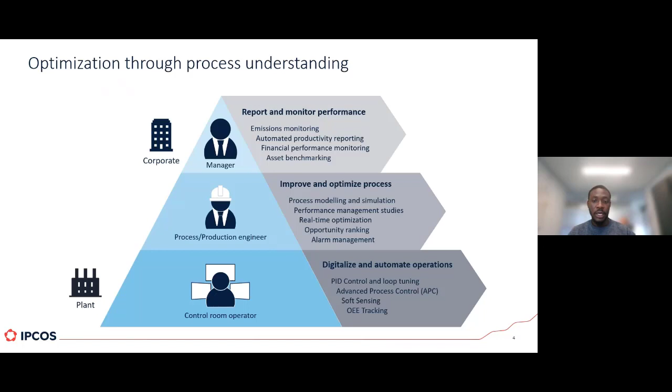Focusing specifically on what IPCOS does, IPCOS's expertise aims to facilitate the needs of users and their use cases. So be they a manager, a field operator, or an engineer, we work with our clients towards optimization, ease of communication, performance monitoring, and specific use cases pertaining to the needs of a specific user.

IPCOS also partners with technology players across all levels of automation. We have worked and still work with partners including Microsoft, AWS, Aveva, and AspenTech. IPCOS also has its own proprietary software pertinent to our advanced process control side of the business.

With our reach across continents and in the process industry, we have clients cutting across industries such as refining, petrochemicals, specialty chemicals, and so on. And these are the industries where batch processes exist. Today's webinar will be focused on the steps towards achieving operational excellence in these processes.

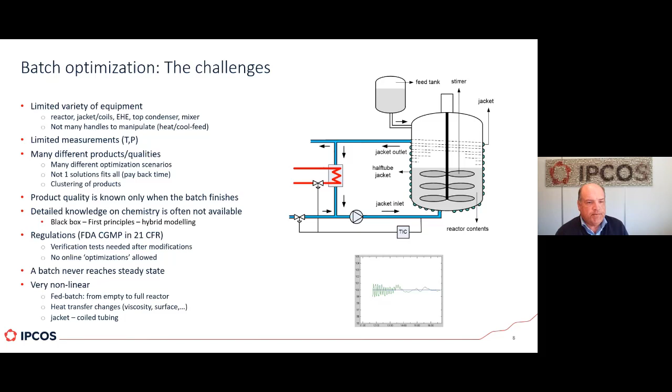So those are all the nasty properties of batch reactors, which makes it much more difficult to optimize them, although from a distance they look like very simple processes.

And then, of course, everybody wants to have the golden batch. The least an optimizer should do is promise and realize that every time you run the batch, you follow the golden batch. The golden batch is the best batch you have ever achieved, really achieved, not in theory but actually executed during the runtime of your equipment. If your optimizer can make sure to repeat that golden batch again and again, most people are already extremely happy.

So that's at least one thing we should do with optimization. Then you can go one step further by saying the golden batch is not the ultimate batch. There is, let's call it, a diamond batch, which is even better, faster, better quality, and so on. That will then become the new golden batch once we achieve it, and from then on it becomes the new standard. So we're going to do everything we can to repeat that new golden batch from now on.

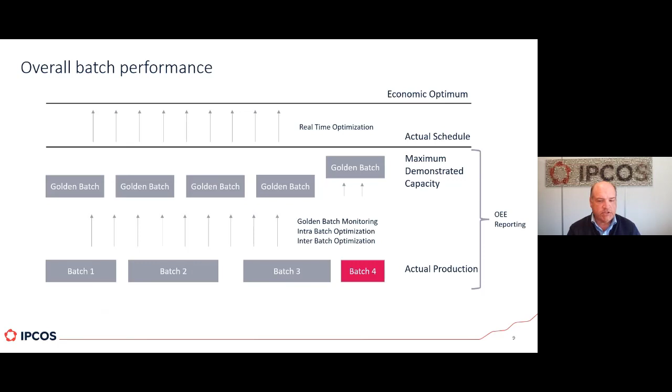And we have different ways to do that: golden batch monitoring, which we'll talk about very briefly, intra-batch optimization, and inter-batch optimization.

Now, if you want to do optimization, then of course it is important to measure how good or how bad you are actually performing, or your batch. OEE is one of the methods which is very often used.

So you have OEE monitoring tools where you see, for instance, so many hours or minutes or seconds in a day. Based on the graph, you can see how much percent of that day the batch was really producing the right quality, because sometimes it produces, but the end result is bad quality. That means a part of the time the batch was producing something which is bad, meaning it was not useful, that batch run.

So that is something that we as IPCOS also provide to our customers, these OEE integration services, because the idea is, first of all, that you bring all your data together from one unit, from multiple units, from one site, from multiple sites. And you do it such that it is automated as much as possible, that you don't have to rely that much on operators to fill in forms and so on.

So there are systems which help you to automate the OEE dashboarding and KPI calculations as much as possible, so that you don't have to rely that much on people to fill in forms, because that means sometimes they will not do it, or they will not do it accurately. So try to do it as automatic as possible.

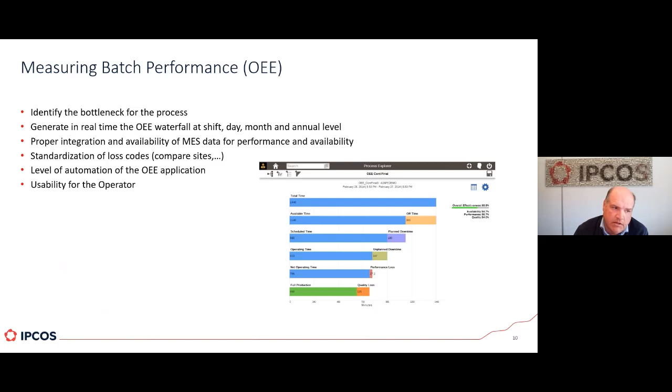Different ways to optimize a batch run.

I have about 3 categories, let's say, and one of them is the least invasive, what we call the golden batch monitoring. So you have your golden batch, we have not changed it yet, so the golden batch is defined from the history. And you have a sort of envelope around your recipe, for instance, and you monitor if your current batch follows or stays within the envelope around your golden batch. It is the least invasive monitoring system, because it just tells you you're doing a good job or you don't do a good job.

Does it already help? Yes. Because assume halfway your batch you get an indication that you don't follow the envelope anymore, or you're drifting away from the optimal recipe, then as an operator you might still intervene and do some corrective actions, if that is possible, if you know what to do when something happens. Worst case is that halfway the batch you say, let's stop the batch because this is going nowhere. I'm going to save 3-4 hours of batch reactor time, because I know that if I let it run it will finish in 3-4 hours, but the quality will be waste anyway. So it's better to stop it now.

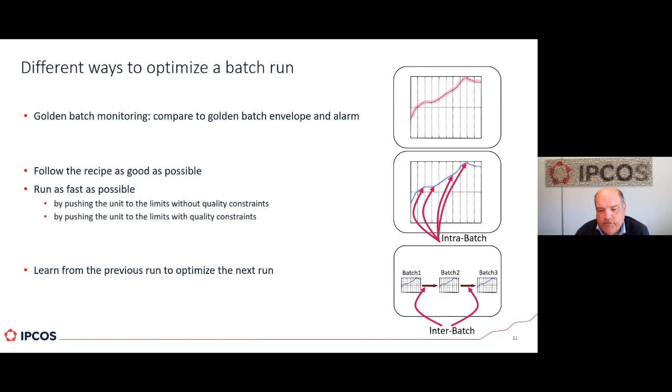There are also a whole bunch of assumptions that we have to make there, but I will come to that later. Follow the recipe as good as possible, and that's typically the job of PID control. So first of all, you have to do an optimal design of your controllers, and then you have to do optimal tuning.

Optimal design means it is very nonlinear, a batch. So valve linearizations, because especially with fed batch, you start with valves which are hardly open, 5%, 10%, because you need hardly any cooling. And then when the batch is full with 60 tons, you need a lot of cooling, so that valve is going to travel from 5% to 95 or 100%. A flow controller can do the job, but in certain conditions you have to do valve linearizations. Split range - why is that important?

If you have temperature control where you heat with hot water and cool with cool water, depending on the delta T of the reactor temperature compared to the cool water, or compared to the hot water, the gain is different. So the impact of opening a valve 1% on the cool water side might be much bigger than the impact of opening a valve 1% on the hot water side. And a PID controller doesn't like that. Good split range control design helps you to overcome that.

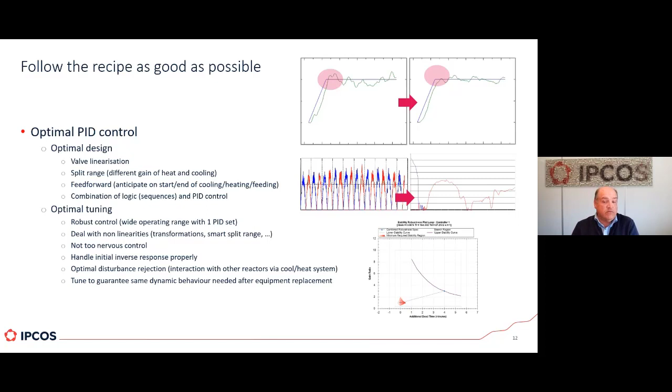Optimal disturbance rejection, especially if heat exchangers talk to each other. Because sometimes you have a hot water circuit and a cold water circuit, and you have a whole bunch of batches connected to it. And if the hot water or the used water from one is entering the other one, then these reactors are going to talk to each other through their cooling and heating system.

That is disturbance you might have to deal with in PID control. So quite already a challenge that you have, and you have to do some optimal PID tuning. First of all, use the proper DCS template. If it's a Siemens, a Rockwell, Emerson, or Honeywell, whatever, tell your software which kind of PID template you have, because that makes life easy.

If possible, that's what we ask our customers, but it's not always possible. We try to convince them to go first for water or solvent batch runs, where not the real products are in there, but some water or water combination with solvents, so that we can do proper tuning based on that. It's as good as it gets, because it's not the real product, but okay, it's better than nothing.

We really like to apply step tests in open loop, with a decent signal to noise ratio. Operators don't like that, but sometimes, well, it has to be done.

Plan B is, of course, that you can do closed loop testing, which is much more difficult. It's not that you throw closed loop data into a PID tuner and, of course, a model will come out and a tuning will come out. Will that be the right tuning? Well, that's the big question. In fact, it's not a question, the answer is no. So closed loop step testing, watch out for it.

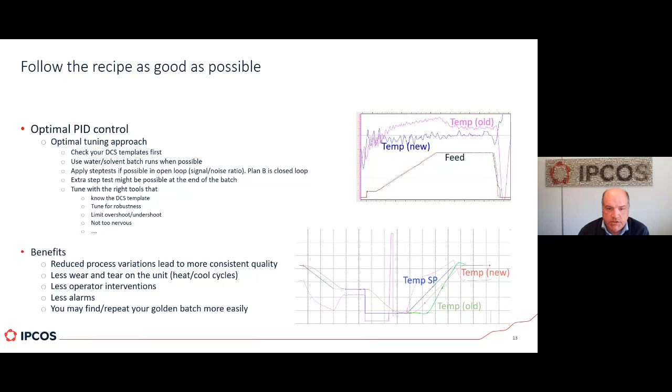Now let's go one step further: run as fast as possible by pushing the unit to the limits with no quality constraints. What does that mean? You assume that you have cooling and heating limits, and that you're going to feed typically as fast as possible. So you're going to change the recipe in this case, and you're going to push to these limits, and you assume that it has no impact on the quality. Okay, that is a very serious assumption, but okay.

Now, what is the advantage if this assumption holds? In fact, you can consider your batch reactor as a non-ending continuous and linear unit. You only have to look a couple of minutes in the future, 10 minutes or so, depending on the batch run—let's say 10 minutes in the future. So it is the principle of receding horizon, what you typically find in classical APCs. Receding horizon: you look into the future, and then you're going to anticipate disturbances and so on, in order to optimize your cooling and heating.

So a standard APC can do the job. You only have a few handles to play with: the feed, and then also play a little bit with the heat exchangers. There's not much you can play with. Disturbances, of course, is perfect to deal with a classical advanced process control. And the nice thing is it's a very small APC—there's almost nothing to play with. A couple of MVs, you have 2 MVs, 3 MVs max. You have hardly any measurements. So a very simple small controller can perfectly do the job.

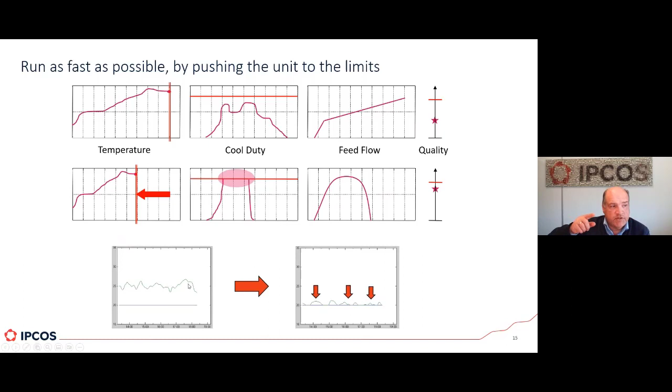Here is a real life example, where you see the inlet temperature of the jacket from the batch reactor. The cool water is at 20 degrees, and the inlet temperature fluctuates around 25 degrees. So there is a part of the cooling water that always goes around. Now, what is the maximum cooling capacity that you have if you only supply fresh cool water and almost nothing comes back?

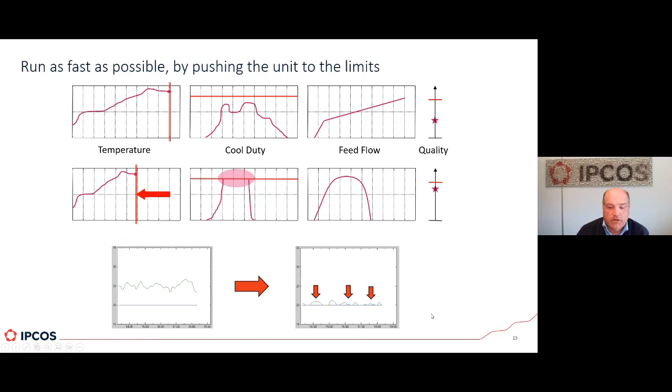That means that if you see your cool water inlet temperature of the jacket close to or at the cool water supply temperature, that means you consume or use all the cooling capacity available, which allows you to speed up the batch reactor. And that's what you see over here - the inlet temperature of the jacket is almost always, or very close to, the cool water supply temperature. Which means you did whatever you could to speed up the batch reactor, and the quality is still okay.

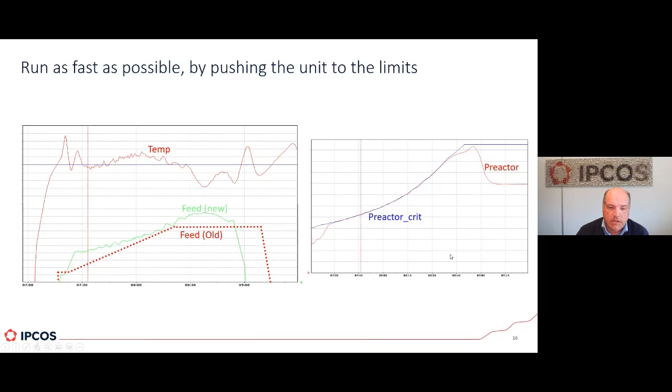So that's what you see, for instance, here as well. The old feed recipe is like this, and this is the new one. You see that you feed faster and more - temperature profile - and then you can add, for instance, an extra constraint, which is the critical reactor pressure, a hard constraint that never exceeds this blue line over here. You see that the APC controller perfectly complies with that. So that's the most easy APC type that you can apply on a batch.

And now the most complicated one is where you say run as fast as possible, but by pushing the unit to the constraints, I'm going to hit my end quality constraints. I cannot tell you at this moment that by just simply looking at the maximum pressure or maximum temperature or a deviation, that will have a quality impact, or no quality impact. No. What you have to do is have a model between what you are doing at this moment and the end quality, and that can be a quite complex model.

So you have to look at your batch as something where the APC always looks until the end of the batch: when I'm doing this, it's going to have an impact on my end quality. Now I'm going to increase the temperature a little bit - oh, my end quality, the density, the color or whatever is going up, and that's not allowed, so I should not do this. So you have to have a relationship between what you're doing now, and even more what you already have done, what you tend to do based on the recipe probably, and then the impact on the end quality. And that is something completely different.

You need other tools and other technologies to deal with that, because you need to have a quality model between process conditions and end quality, in an environment where nobody really knows what's happening inside the reactor.

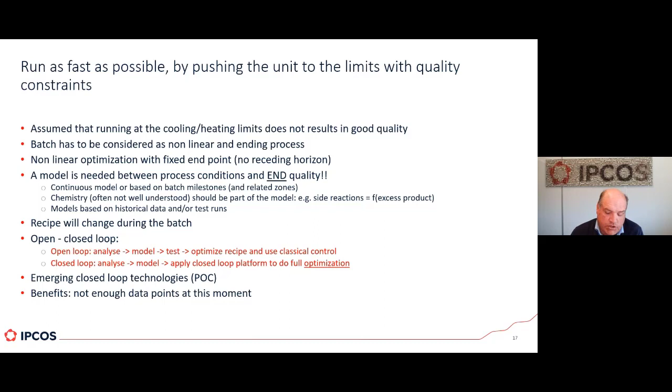So there are at this moment, depending on which vendor, a couple of strategies that are used. One is where you say we have a couple of milestones we define, and you can make as many, well, not as many as you like because it will complicate the approach, but you define a couple of milestones.

And then you make a model between what happens at that milestone and the batch end. So you have here a model between this point and the end quality, between this point and the end quality, and so on. That's the most simple, based on black box, principal component analysis, AI, and so on.

The next level is that you say, I have these same milestones, but I'm not only going to look at the condition at this point, I'm also going to look in one way or the other. I'm going to lump the history between this milestone and this one. So what have I done here, or what happened in this area over here?

I'm going to use the conditions here and what happened over here to estimate the end quality. Yeah, that's a little bit more complicated, a lot more complicated, but that's the next step. Also black box data driven. And then the most complicated one is where at every minute or second you have a whole model that really takes everything into consideration, like the linear APCs you find in refineries. At every instance it predicts what have I done, what's going to happen, what's the end quality, and so on. So this is the most complicated one. I have not seen black box solutions that are able to do that. Very often people start looking into first principles.

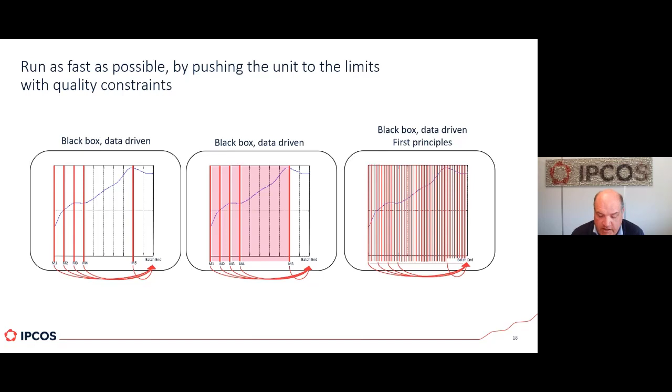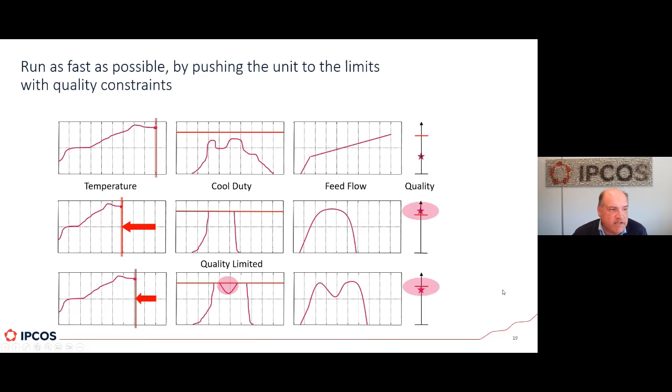Keep it simple - that's always been a very good approach in the APC world, and I think here it's also valid. So comparing it to the previous one where I said push to the limits and everything will be fine, you have a different story here. You push to the limits, and then you see the quality is above what is acceptable. That means there's a milestone where you say, no, I have to stop pushing the cool constraints or heat constraints, whatever. I have to back off a little bit because that will bring my quality back into the specs. And to do that, you need a whole different kind of technology. That's what you see over here.

This is a batch recipe - the feed flow, and this is a fed batch. You see we started decreasing the batch time, so it's faster and faster and faster. You see feed changes. It's not as strict as over here - it's a little bit higher than the set point. So you can finish earlier, provided you know exactly what to do to guarantee the quality.

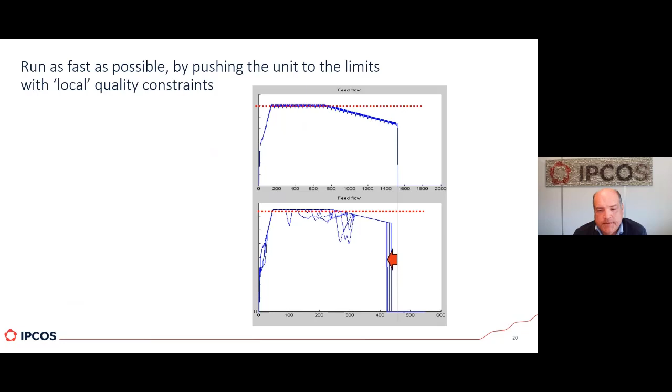We have had situations where the customer said, well, we pushed to whatever we knew based on the knowledge we had, but we saw that in our paint, polyacrylate, there were granules appearing in the paint, and that's completely unacceptable. Then the question is, what should we have done during the batch to prevent that? The answer is no clue. The only thing you can do is slow it down based on engineering feeling, until the granules are gone. Of course, if somebody had known the relationship between the behavior and these granules, we would push to the real limit. But if it's not known, you say let's slow it down a bit until that magic thing we don't want is gone. So it's one way to look at it, but it's not optimal - this is reality.

And the last point, then we finish, is of course to learn from the previous batch to optimize the next one. A couple of assumptions, of course, is that the next one should be very similar or the same as the previous one - that's a no-brainer. But what's less trivial is the fact that you know what the previous batch did before the new one starts, and that's a problem.

Because, for instance, for PVC, the end quality, which is important, is only known after drying, extrusion, and so on - only 12 hours after the batch is finished can somebody tell you, okay, you did a good job. And what have you now learned for the next batch, which probably has also already finished? So as long as you make the same grades, you can keep reusing that information. But if after 12 hours you know what you've done, and in the meantime you're producing a completely different product, that information is almost useless, unless perhaps you can reuse it in 5 or 6 days when you make the same product again, assuming you're working under the same conditions.

And of course, you still need to know what kind of handles to play with. You still need to know the quality was bad because of something. The temperature was too high, the deviation from the set point was too big, we had an overshoot, or the rate of change was off. So somebody has to give you a handle, saying, okay, I'm going to give you a certain limitation for the next batch, and if you comply with it, rest assured the end quality will be good. Somebody has to tell you, or you have to find it out yourself. But that's very critical.

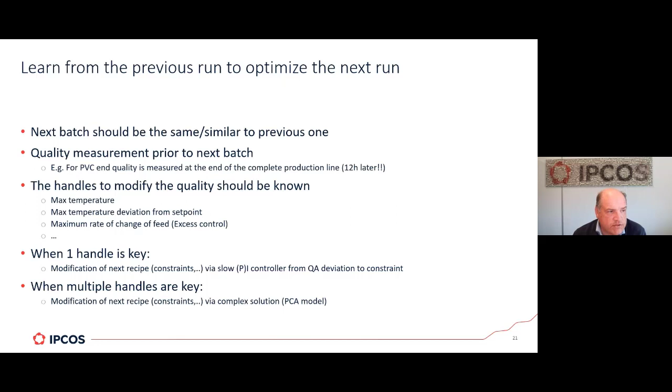Of course, if we have five handles to play with, that's a different story, because which one are we going to play, what's the sensitivity? You have to do sensitivity analysis and so on. So that's a very complex formulation that you have to find. Interbatch control is very powerful under certain assumptions, if you know what kind of handles you have to play with.

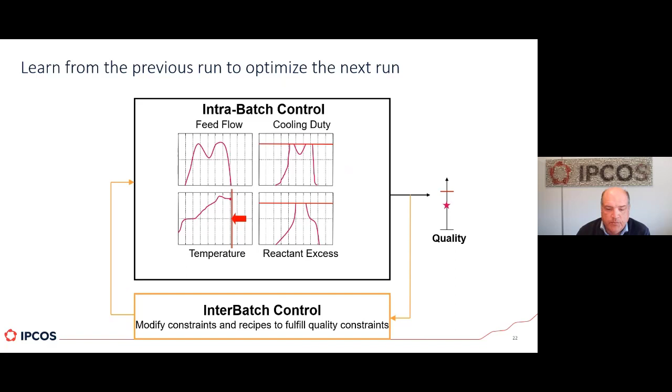So, for instance, you run the batch, you optimize it, the quality is okay, and then you apply an interbatch controller which says, well, the quality here was too good, it cost me too much energy. So you're going to do something such that the quality is just at the threshold, but you consume less energy, or you can do it faster, or whatever. So that's a good one.

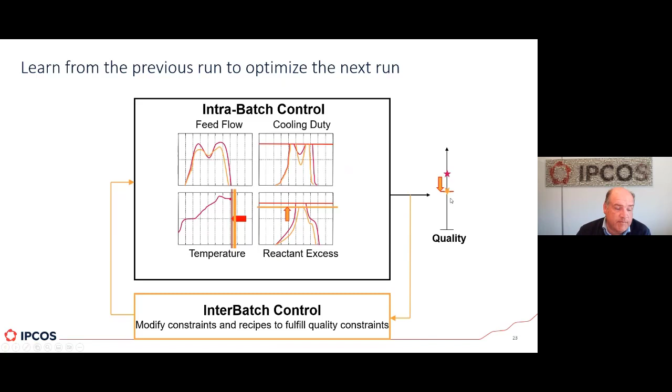Of course, if you have off-spec product, like this, you're off spec. What can you learn for the next recipe? For instance, feed slower, use less, do everything much slower, so that your quality is again at the threshold, which is acceptable. This one is not sellable, this one is sellable.

Good. So those are the different ways how you can optimize batches, and you see everything is connected. You have the PID tuning, the PID design, you have the OEE, where you can really measure have I done a good job, yes or no. So you have to look at it from multiple angles.

What I would always suggest is to go for a study to design the perfect roadmap. Talk to operators. How many products do we have? How many reactors? Which products do you make on which reactors? With which products do you have issues, and which ones don't you have issues with?

Assess the current control performance, your temperature control, your quality control, your golden batches, and so on. Start with the base layer. If the design is okay, then at least look at the tuning, perhaps do some better tuning or a bit better design, split range control, disturbance rejection, and so on. Then you can make a plan for the next step if that's worth the investment.

APC, full-blown nonlinear, linear, and so on. Implement something that keeps track of your performance, like OEE systems and so on. And then you have a good approach to optimize your batch reactors.

And benefits can be really huge, especially since margins typically in specialties are higher than in bulk, I think that's quite a reasonable assumption. If you can speed up your reactors, improve quality and so on, I think it's really a good return on investment. But you have to think about many things before you jump into this. Well, adventure is perhaps too negative a word, but it's fun and it generates a lot of money.

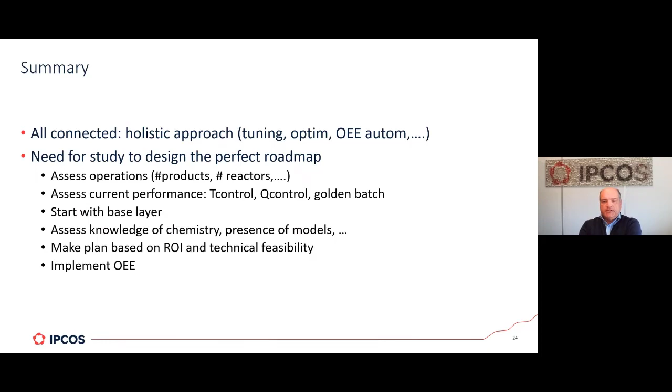We have a question from an attendee in Qatar asking what are good estimates for batch reactor time reduction with APC. It's not very easy, but based on limited information for full-blown APC, I'd think about 10% reactor time reduction—sometimes 8%, sometimes 12 or 13%, but 10-ish%. So a batch of 20 hours could be reduced to, for instance, 18 hours.

Reducing it by 50% would be quite crazy, but 10% is a reasonable assumption. If I can reduce my batch by 10%, what would be the impact on production and so on—that's a good initial exercise that every end customer can do to figure out what the system would bring to them.